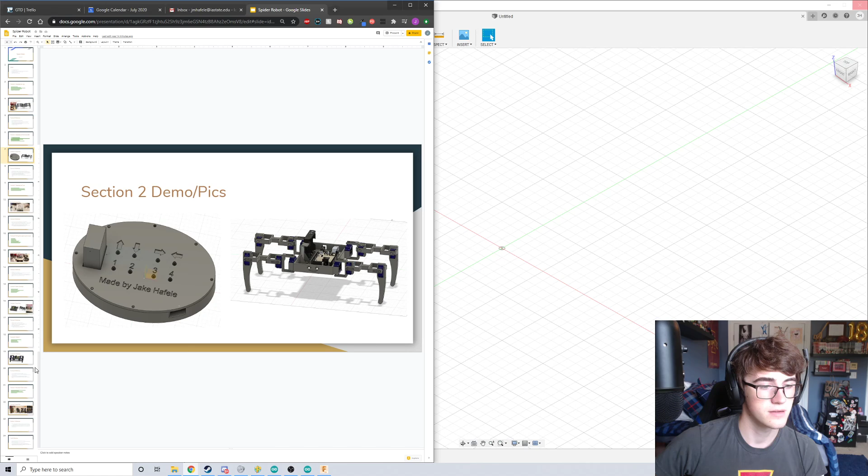I should have pulled this up before, but that's okay. This guy's pretty small. I really like this design. I kind of like how it's shorter and more hunkered down. It still kind of feels like a spider.

It was a little hard to code the legs since I didn't have that second joint to move this part of the leg up as it swung over. But it ended up working out really well. The guy kind of zips around, but it works out.

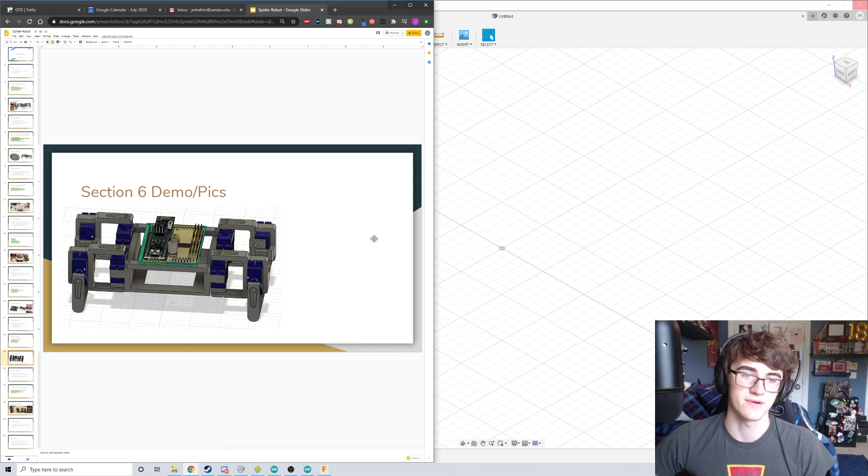Using 2 servos per leg gives me the option for using 6 legs. Probably not for this project, but maybe more in the future. I can make the base a little longer and give it 6 legs. That might be kind of fun. For now, I'll stick to 4 since I can reuse my current base that I printed.

It was really nice because I only had to reprint joint 1 and this new joint 2 leg type of thing. The legs took about half an hour, and the joints were about an hour. Compared to how much I was having to print before, it wasn't too bad.

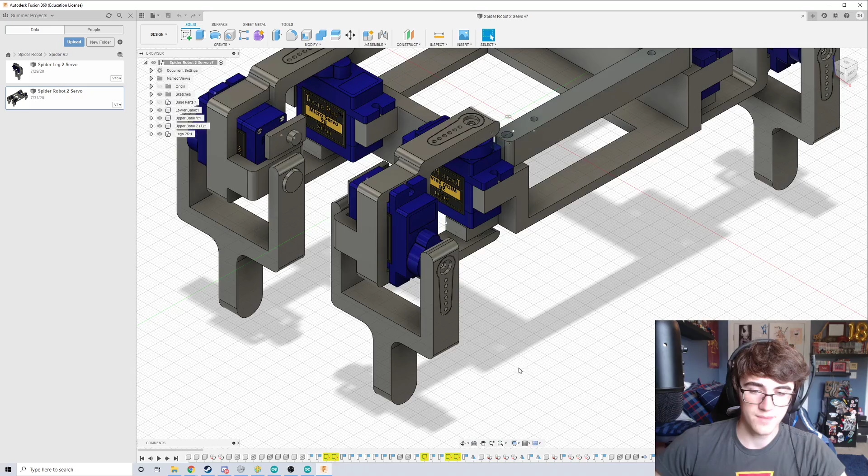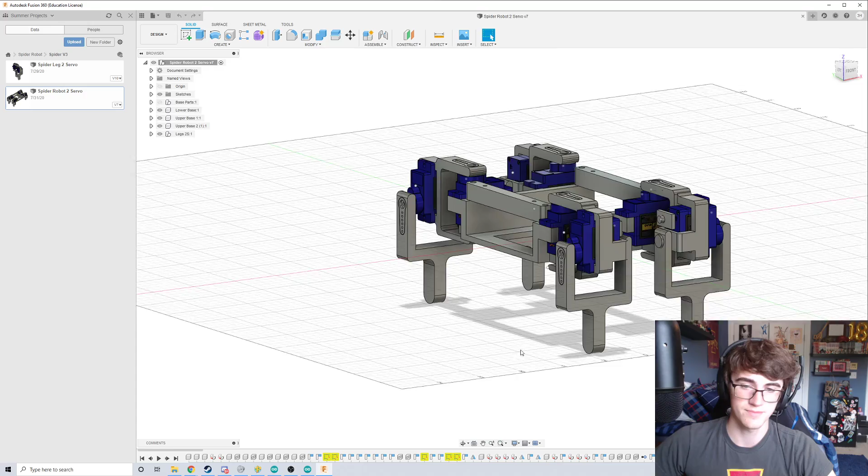So I ended up redesigning, or adding, this little part to the legs. I printed those off, but I didn't use them because I liked how wide these legs covered. At first I was worried about it since they're long like that, but I didn't end up using this part. I still designed and printed it in case I wanted it, but it made things a little taller, and I kind of like how low it is now.

As you can see here, right in here, there's this little circle part. Let me try to select these pieces. Let's go to this leg. I think I can do it.

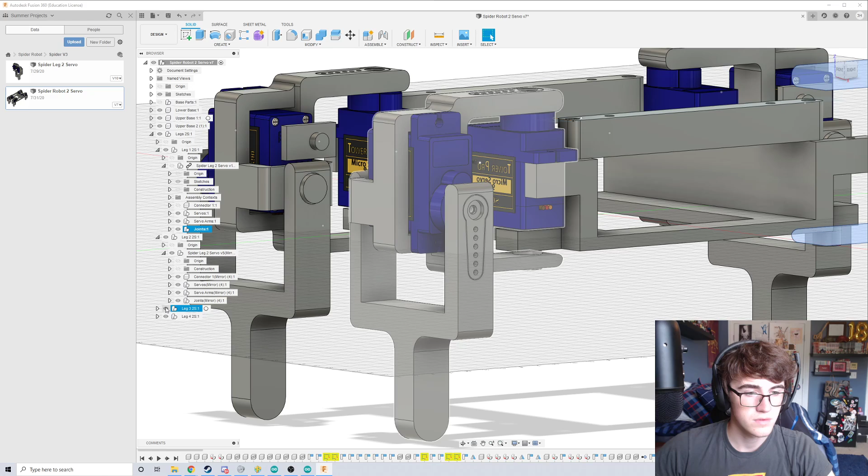So as you can see in the CAD design, the servos basically mount onto the pieces with the screws that come with them. Then there's the servo horns that come with them, and I basically just extruded a hole out of them.

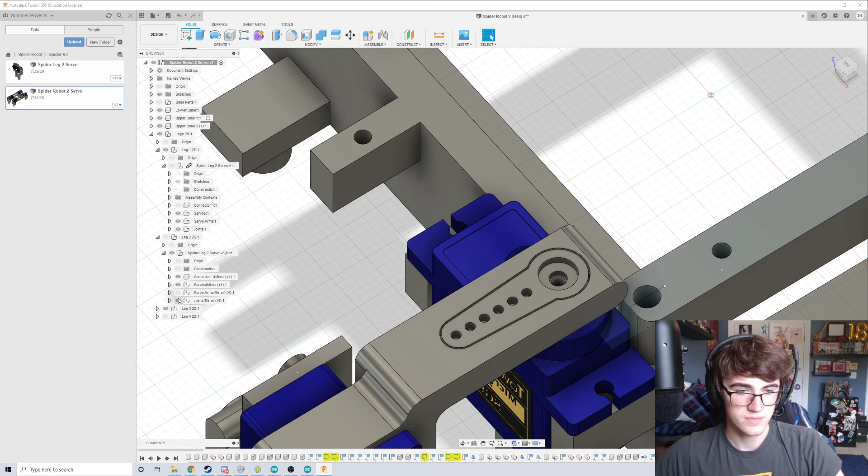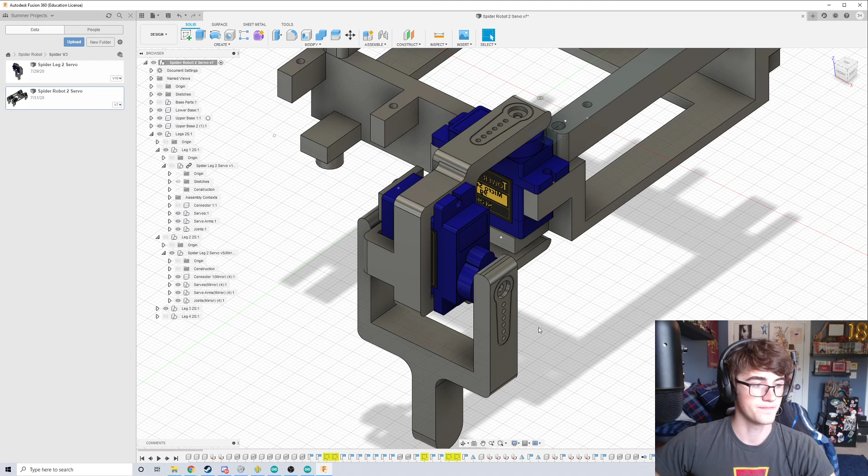This part is an actual little plastic piece that comes with the servos, so there's a hole for that in this piece, a little wider than it for user error. Then there's this hole here that connects to this piece, which helps keep the servo side connected.

Let me put these guys back here. This CAD software is so nice. It's a lot of tweaking and a lot of printing, but once you get it honed in, it works really well. I'm really happy with how this design turned out because it made it so I could code the movement really well.

I wanted to add functions for moving forward, backward, left, and right, and functions for other fun actions - things like a push-up, dancing, standing still, stuff that's a lot less complicated than the movement code and that I can easily change. I added a switch case so I could queue up actions from the controller.